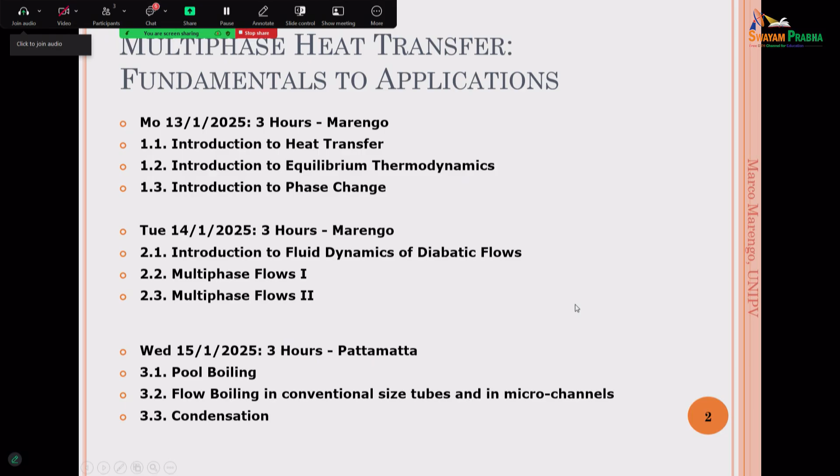So let's start, very simple. The first lesson is about the flow regimes and their classification, and the fundamentals of multiphase flow physics.

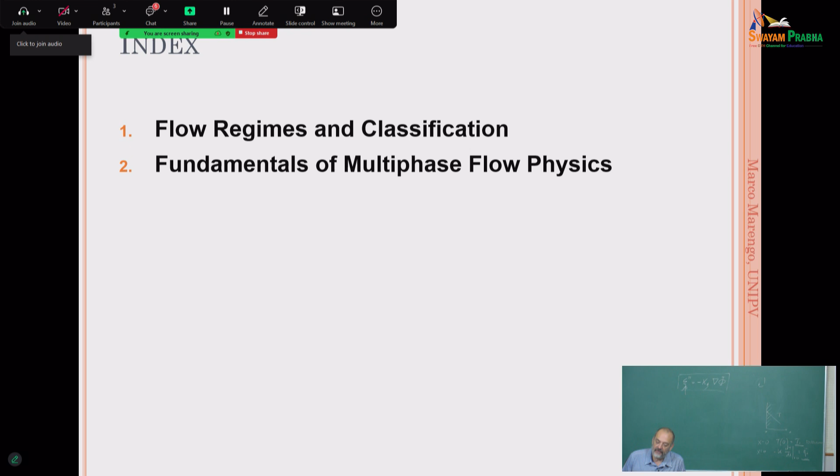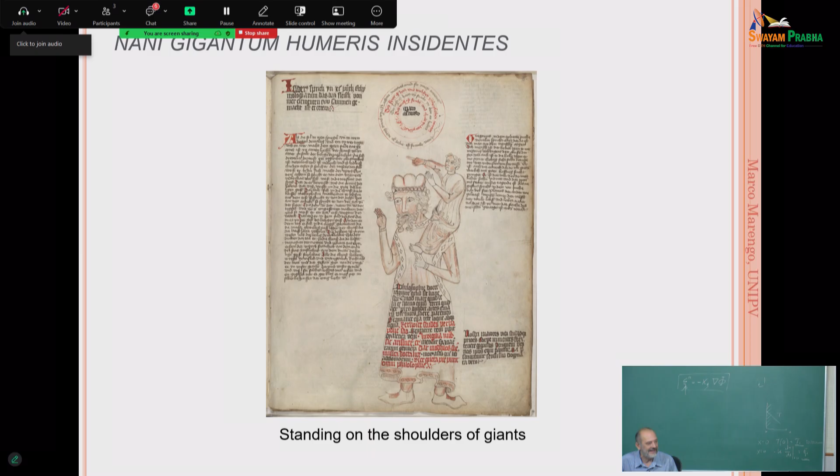There is a very important sentence in Latin, nani gigantum humeris insidentes, which means standing on the shoulders of giants. This is something I like very much. You saw before I used the book of Bird, Stewart, and Lightfoot. In statistical mechanics, there is a book of Huang that is very good for me. Every time I'm giving lectures, I ask myself, where did I get these notions? I was a student 40 years ago, studying all this kind of stuff.

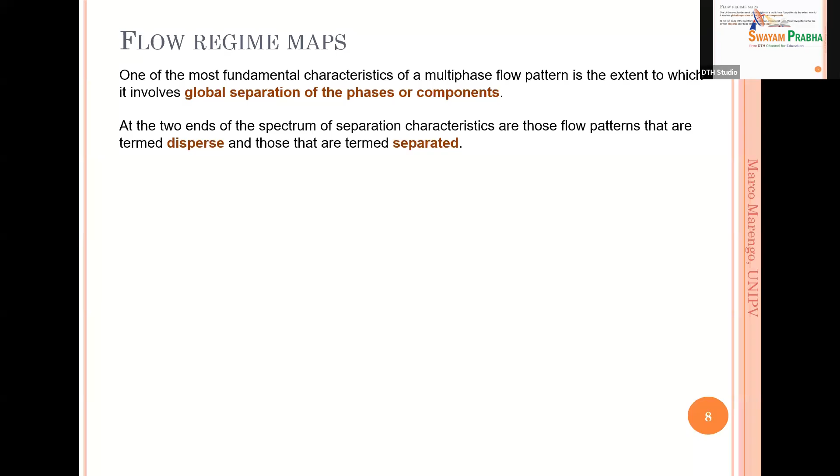About the first thing, we need to understand when we have different phases or components, the separation among the phases and components. There is a large spectrum. You will learn, as I was discussing before during the break, that with multiphase flows nothing is 100% safe, secure, and reliable. There is always a kind of gray region of knowledge that we may have. For example, the classical separation in multiphase flows is between dispersed and separated flows. But again, between these two ends, we have something in between. So we are starting with the complexity now.

But the definition is very clear. A dispersed flow is a flow in which one phase is completely distributed and dispersed inside the continuous phase. For example, imagine solid particles floating in a fluid, or bubbles in a pipeline, or droplets like in a spray. You are spraying droplets, and these droplets are going around, exchanging heat and mass with the environment, with the continuum phase.

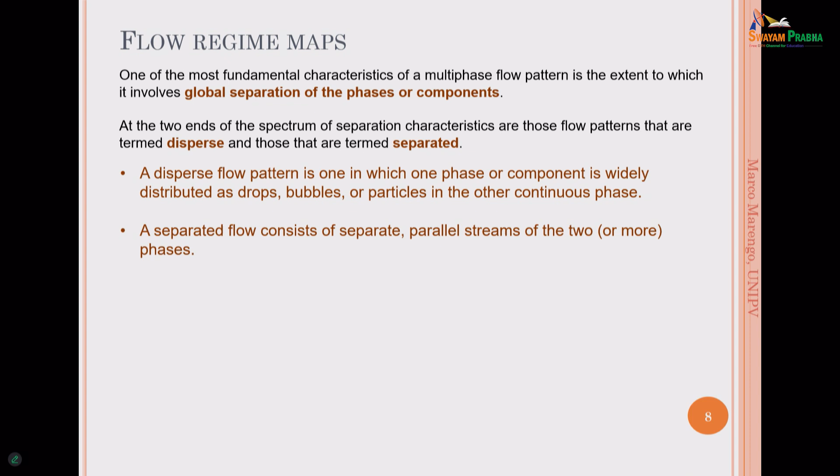Then we have a separated flow, for example when we have two phases that are completely separated, such as stratified flows. They are living almost an independent life, separated in this way. So we have a flow, for example, water and oil. The oil is floating and the water is going in another direction. There is something in between, which is the interface, and we are going to study this on Thursday. But apart from that, we can write an equation for the water and for the oil.

But pay attention, this simple distinction about the two phases is not so easy. What we can say is that if we have an asymptotic limit for dispersed flows, when we have a very large number of small particles - imagine a lot of nanoparticles in a flow - we can consider this as a single phase, homogeneous flow. Of course properties will change: if you have nanoparticles inside the system, the viscosity may not be the viscosity of the main flow, because of the presence of nanoparticles, and also the heat capacity and conductivity change. But we can average, and consider homogeneous flows like a single flow where we have different properties. This is the asymptotic case of the dispersed flow.

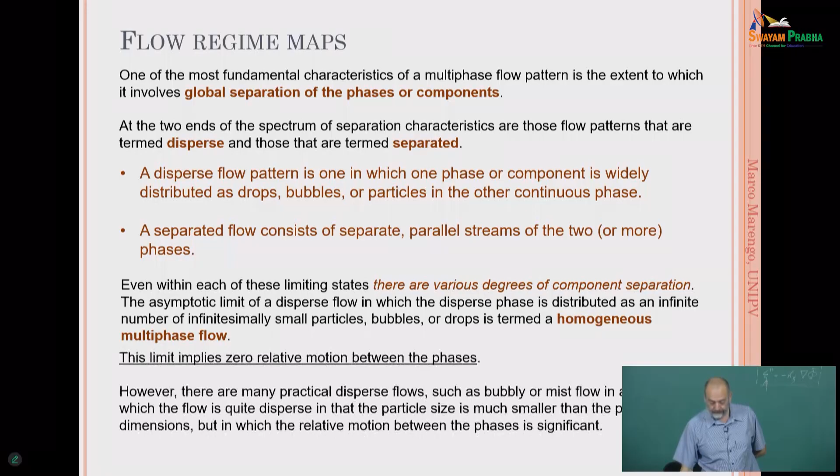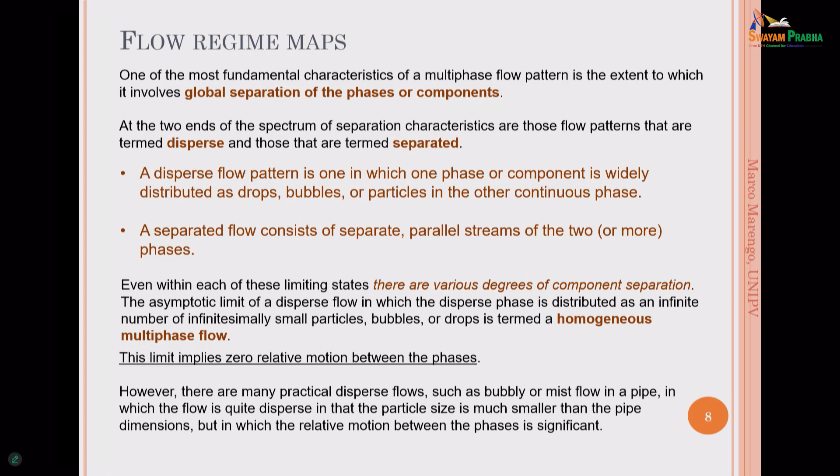In this sense, this means that the nanoparticles are following the flow at all points, so there is no difference between the velocity of the continuum phase and the velocity of the dispersed phase. As I said, there are different levels of separation. For example, I mentioned the water and the oil - this is a very typical example.

Consider also the so-called annular flow, which we are going to see. Annular flow means that we have liquid on a pipe, around the pipe, and gas that is flowing inside. There is an interaction in terms of energy and momentum, because, for example, the gas can create waves, and from the waves we can create droplets that are produced by the movement of the gas.

Because there is, let's say, a tearing of the liquid in this way. Okay. So, is this dispersed or separated, now, you see? Then it's becoming difficult. Is it separated? Yeah, it's separated because we have liquid and gas inside, but then we are producing droplets, right? So it's also dispersed. See, there are different degrees, okay? So it's always a little bit difficult.

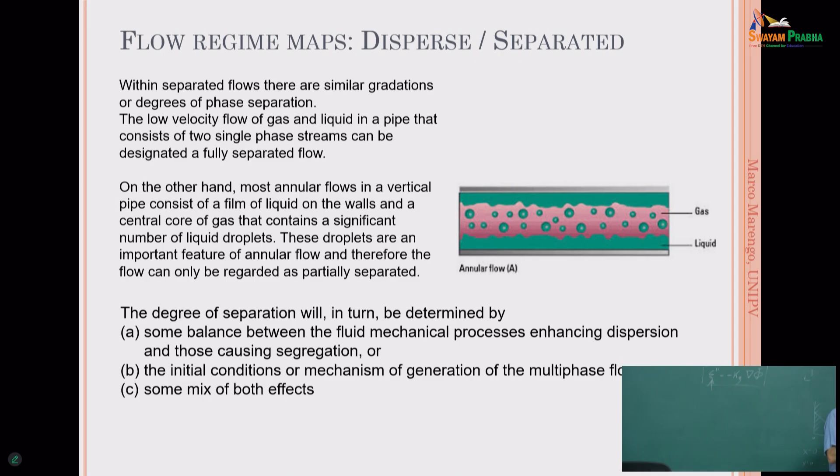But, for example, when we are thinking about a spray, we can say that a spray is a kind of dispersed multiphase flow, okay, with the droplets that are going around. So the degree of the separation depends on at least three factors. Let's say two factors and a mix of the two others. One is the balance of the fluid mechanical process of dispersion and segregation, okay? But also the initial conditions are very important, so the boundary conditions.

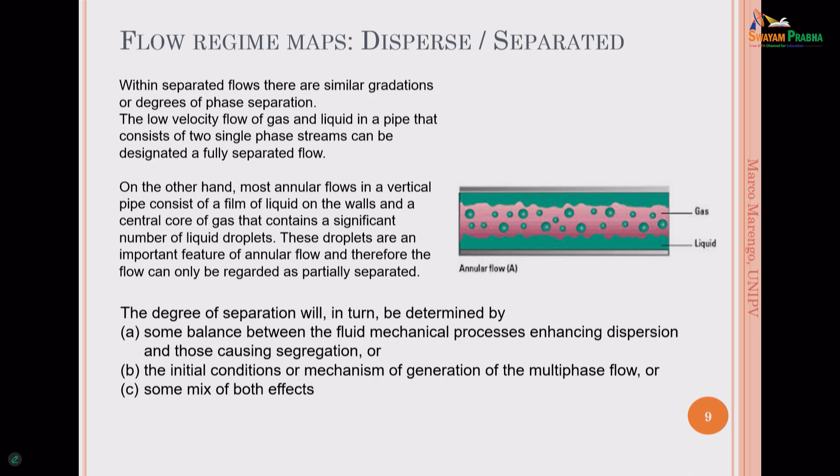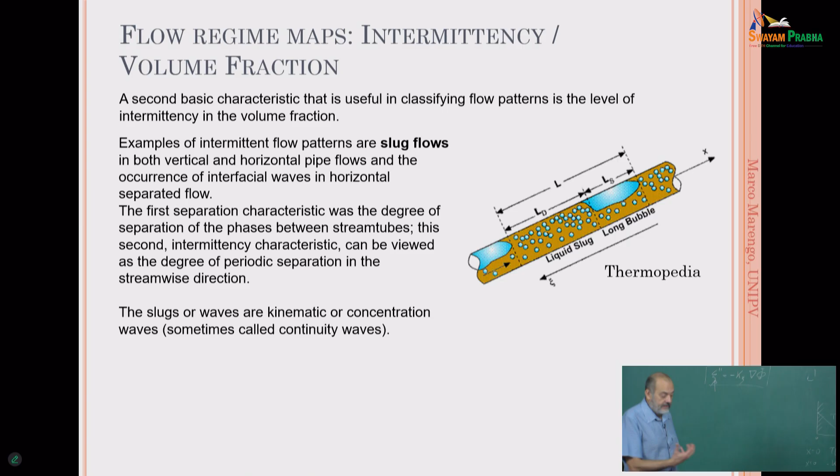The initial conditions in terms of generation of the multiphase flows, or the boundary condition, again, is a generation of the multiphase flow. Then we have to consider another basic characteristic of the multiphase flow, which is the so-called intermittency. Okay, so is it possible that the regimes are going to vary? For example, imagine to have a big bubble, so we can say, oh, this is the slug flow. So we have a flow of the liquid, we have a bubble inside.

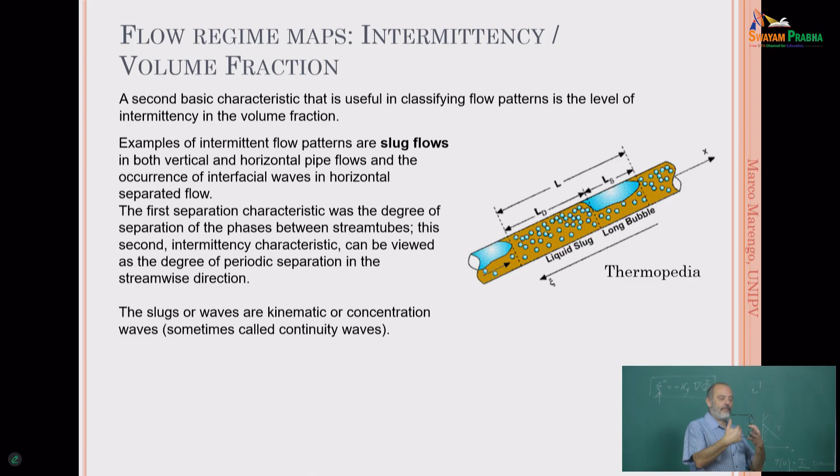Everything is nice, but then at a given point, this bubble is going to break, or we are going to have some other phenomena, okay? A strong acceleration, sloshing, for example, that is happening also for propellant and for space applications and so on. We have sloshing. So what is happening is that this nice bubble is going to produce a lot of bubbles, okay? So we are going to pass from one regime to another,

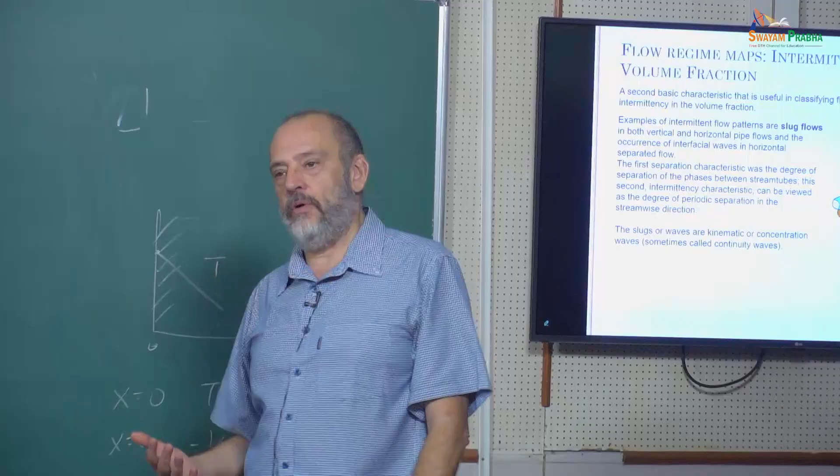and maybe back to the first one. So in the multiphase flow, we can say there is one regime, and we are going to see these different regimes, but it's possible also to have an intermittency. So we can have a time for one regime and a time for another regime, and vice versa. Okay, so the things are becoming really super complex.

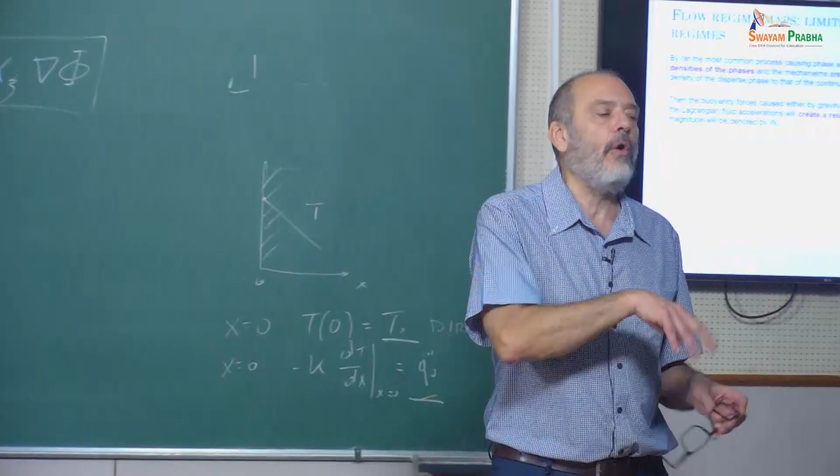Another point to consider is the fact that in many multiphase systems, we are going to have a difference of densities. Oil, water, solid particles and the fluid, gas and liquid, and so on. But the difference of the density, when we have an acceleration, or let's say a bulk force in general, gravity, means that we have a separation due to the buoyancy.

Okay? This is the reason why we are doing a lot of experiments in microgravity, for example, in space, linked to the difference of densities, because of course, when you don't have an external force, things can change. Or maybe we can even better understand what is happening, because we are switching off one of the components of the momentum equation.

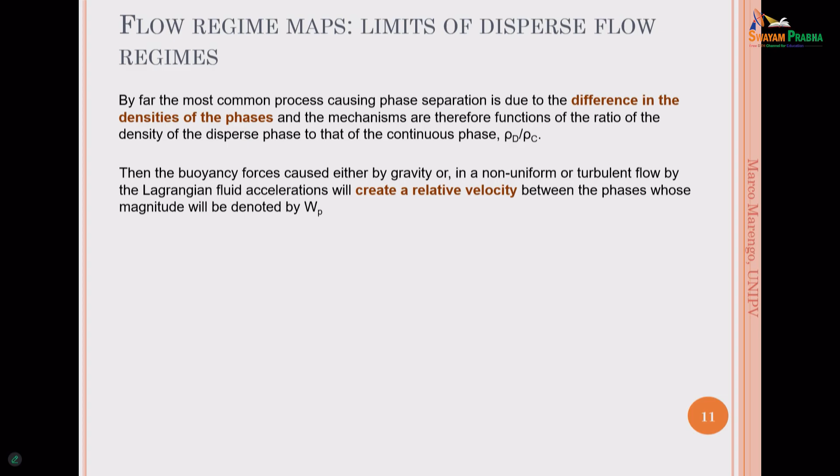And then there is another point. Consider a multiphase flow, imagine to have bubbles inside the liquid, okay? Liquid that is flowing. The bubbles can maybe expand or they can contract. So you are creating local accelerations. Okay, so we need to consider an equation that is much more complex with respect to what we had before, because it needs to consider the interaction between one component with respect to the other.

So remember, we did these shear stresses in the first hour. Okay, fine, it was good. Complex, but more or less we understood. But now if we have another component, bubbles, particles, and so on, the particles can cause another stress. For example, imagine that you have solid particles that are going to rotate inside. So this rotation is producing a vortex. So it's producing extra stresses.

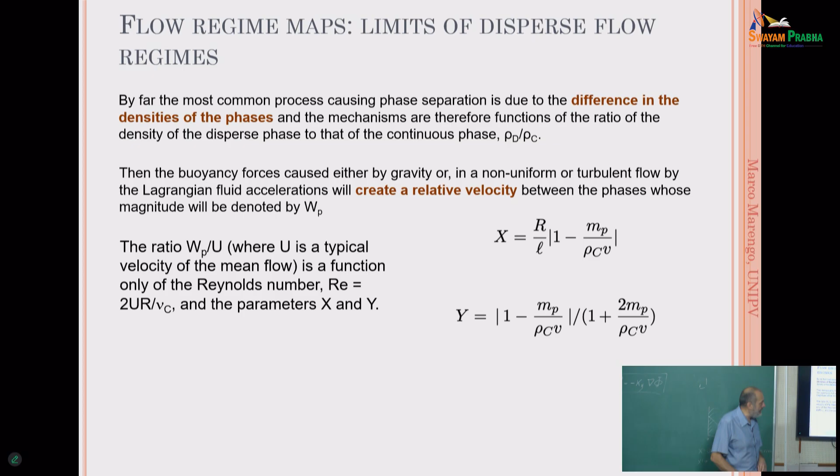X and Y again contain the mass. R is the particle size, and MP is the mass of the particle. L is the characteristic length, for example, of the nozzle, and V is the volume of the particle or the sphere that we have. Okay, so then, let's say, asymptotic condition. I have no time to enter in this field, but what will be interesting is to understand how local accelerations of the dispersed component can influence the mean relative velocity inside the flow.

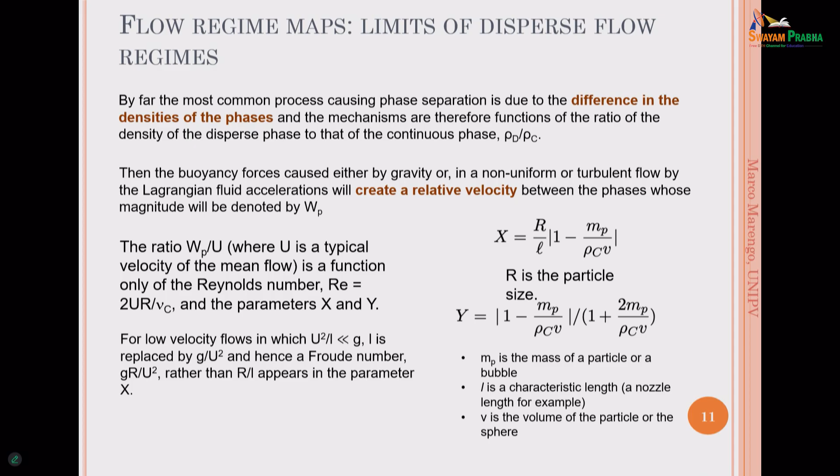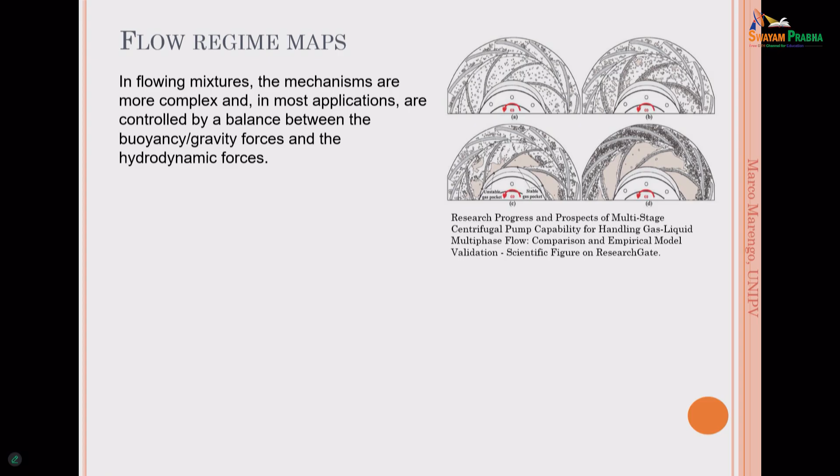And so, as you can understand, we have buoyancy and we have acceleration, no? Because of the different density. Well, we can use this information saying that, for example, when we have different conditions in terms of density, we are going to have segregation of the particles, the bubbles, and so on.

For example, if you consider something that is rotating and we have solid particles, a solid particle usually has a density that is bigger than the density of the continuum phase. So imagine you have in a system solid particles in a fluidized bed, something like that, and then you have a gas inside. If we put the gas in motion, creating a vortex, for example, it's very clear that because of the centrifugal force, the particles are going to touch the wall. No? It's a cyclone system.

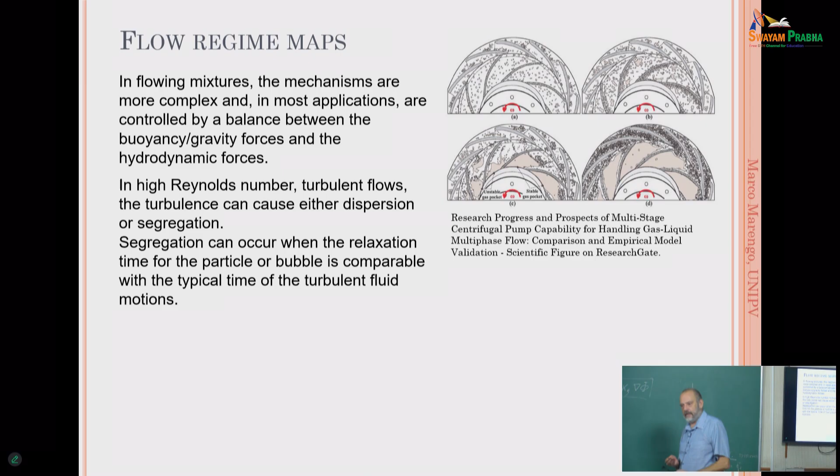Okay? This is interesting. If the density is different, for example, if the density of the particle is smaller than the density of the liquid, when we create the vortex, we are creating another situation. We are almost obliging the bubbles, in this case, to construct forms, because they are going to aggregate themselves. So you are going to construct forms like you saw here, where this is interesting because this is the velocity of particles inside, okay, in atmospheric flow.

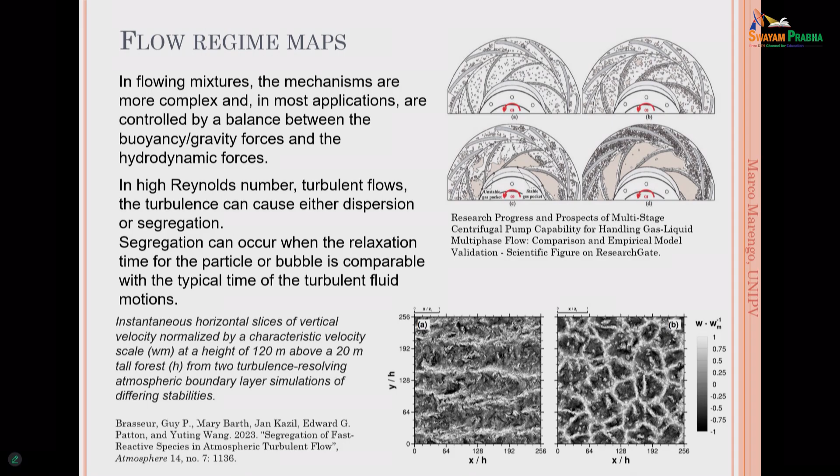Atmospheric flow, sorry, is a multiphase system. It's quite complex, very complex, okay, with a lot of different things. And we spoke about something that is rotating, so the solid particles going to the wall. The bubbles are going to build structures, because the density is lower than the continuum phase.

And when we have characteristics like what we have in the atmosphere, we are dealing with turbulence because the dimension is very big, okay? So in this case, we have structures like that. So we are forming clustering of the dispersed phase. And there are a lot of studies about this kind of situation, okay, where we can see really what is happening.

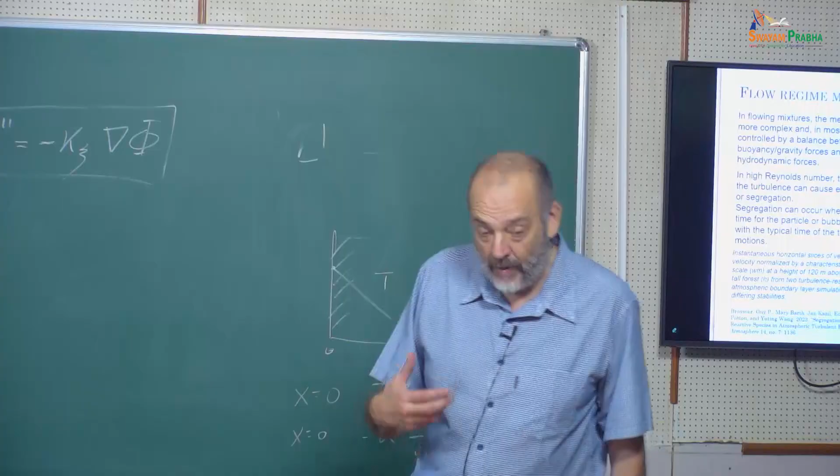Another point to say, we said that already, but it's better to repeat: the particles have an effect on the turbulence level. We are going to see this later on. So there is an interplay between the two phases, okay? And it's quite difficult to understand what is really happening.

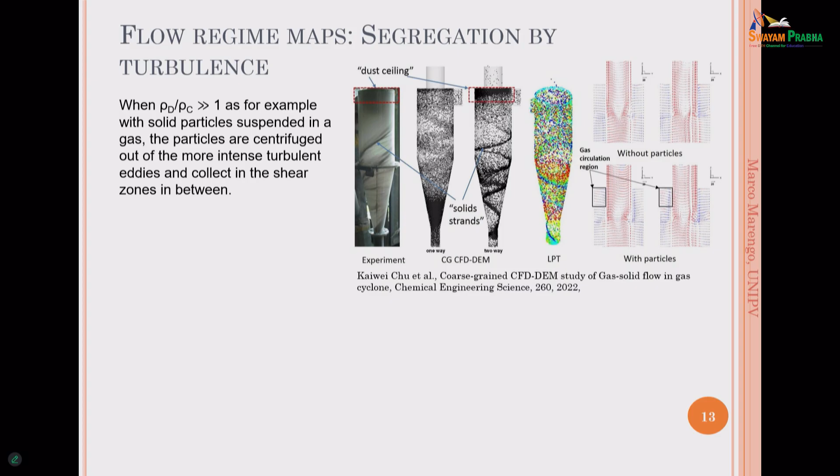In fact, for example, this is the classical condition, as I told you, of particles in a cyclone. And you can see here that the particles are going to form, and you have different conditions, no? And you can also try to simulate what is happening in this cyclone. We have a gas circulation region. We have a region without particles, and so on, okay?

So, for example, with cavitation, the formation of the bubbles is changing the characteristics of the motion of the flow. Okay, so these are already quite complex situations to study. They are changing the turbulence level, the turbulence intensity. So as you can understand, it's quite complex. You can see other material here if you want to know a little bit more.

The formation of the bubbles is interesting because of cavitation, for example, and on the opposite side, we have formation of condensation. We have formation of droplets. No? Again, they are influencing the turbulence level and so on.

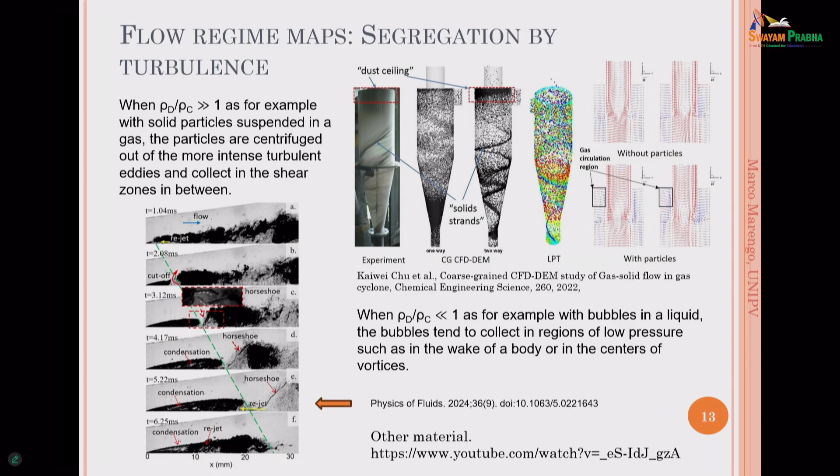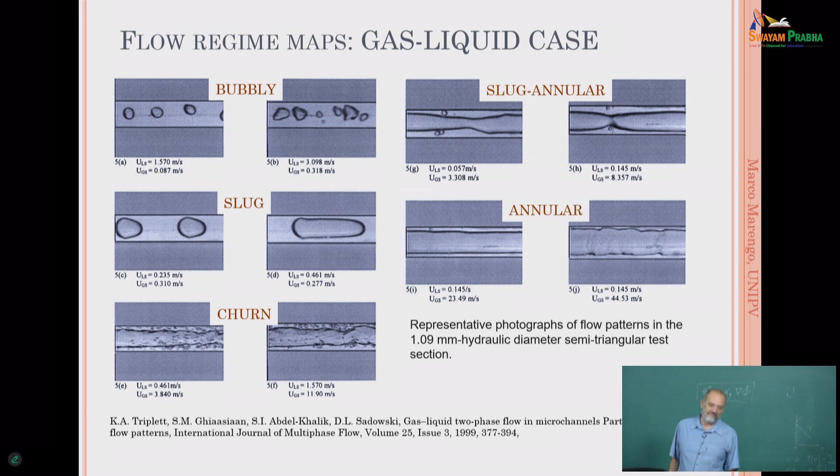Then we have churn flow, where we have what we saw before. So it's a kind of annular flow, but we have a lot of bubbles going around. So it's a mixture. Here the separation between the two phases is a little bit more complex. It's difficult to say it's separated or, well, I don't know. Then we have slug and annular.

So we have the slug, where we already have the gas inside in the form of bubbles, where the velocity of the gas inside is pretty small. But then we have annular flow. Annular flow means that the gas inside has a given velocity, and the liquid film maybe is dragged away because of the motion of the gas.

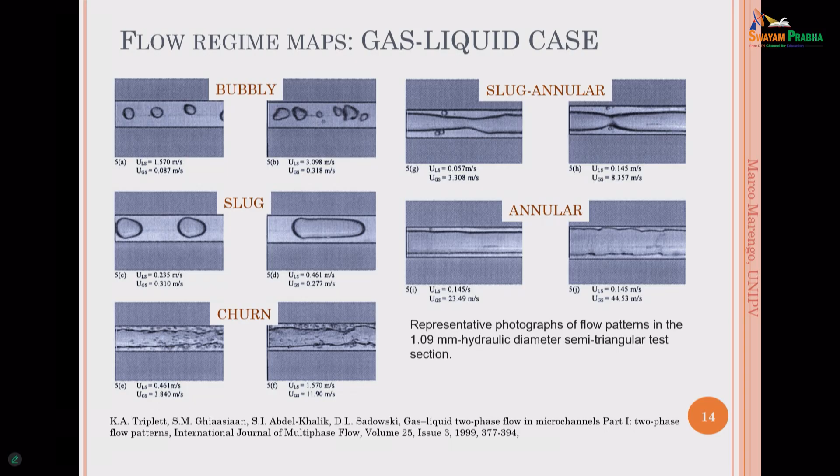So this is the classical picture of what is happening. In this case, it's a very, very small channel, because it's a channel of 1 millimeter. I put this one and not other cases with the bigger pipes, because really I wanted to stress the fact that multiphase flows are really a multi-scale problem. So we can pass from, let's say, 100 nanometers.

I know a guy in Paris that is studying the flow in nanotubes. A little bit difficult. So he's putting a nanotube, and he was able to have the flow and visualize the flow that is going outside. And he was also able to measure the pressure drop. So what? It's not possible to have, let's say, a manometer, a gauge, no?

It's not possible. But he did this because he had an idea of the velocity of the outlet because he measured the cone of the fluid that is going outside. From the dimension of the cone, it's possible to do some numerical simulation and to extrapolate the velocity at the entrance and the exit. So it's possible to understand the difference of pressure. So it's a nanoscale phenomenon. The nanotubes were about 20 nanometers, so small, but then we can have also big pipes. So it's really completely different, meters.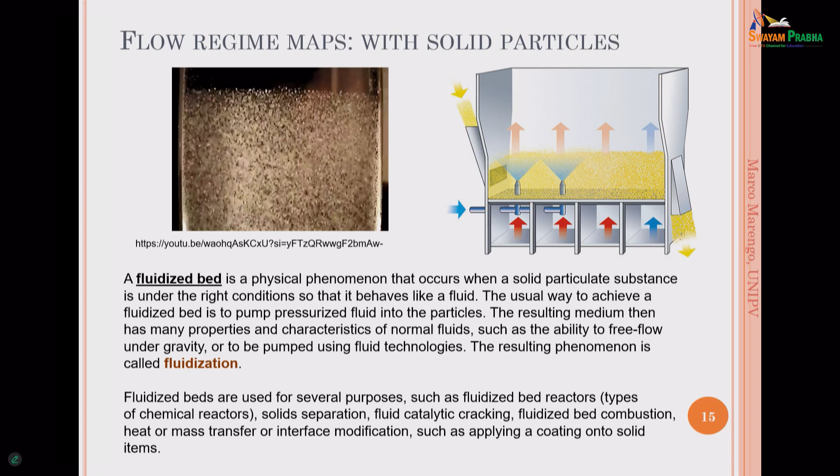So we have this kind of situation where we are using the continuum phase in order to keep the particles separated and convey the particles to another point. In this case, the fact that we have so many particles is saying that we are already in the direction of a homogeneous flow. So we could consider this system as a single phase, but with other properties. Of course, if you want to study, for example, the turbulence, here it is quite complex because the particles have an influence.

So many times what my colleagues are doing, not we because I didn't do simulation on that, is to put coefficients. And with the coefficient, you need to arrange the viscosity. So instead of having viscosity, you have something else. Usually it's a Newtonian fluid, at least, but then you need to change the value of the viscosity in order to fit with the experimental data, for example. It's not possible really to calculate how much is the viscosity for all these kinds of situations. And so you have different conditions and so on.

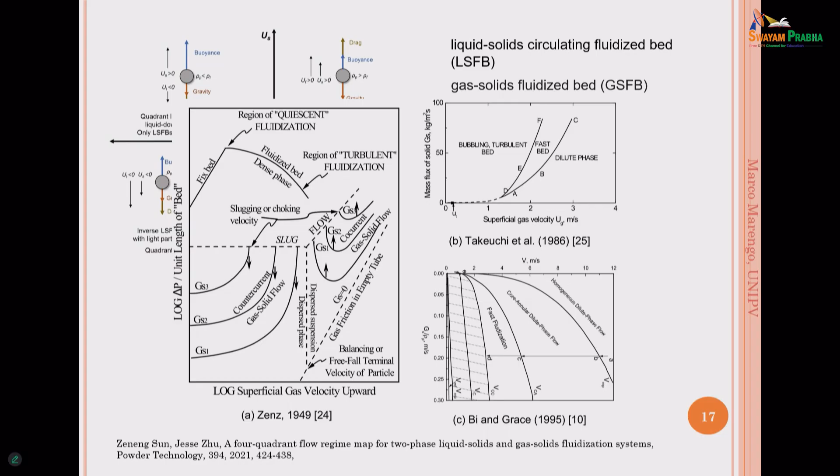This is a paper, for example, on the gas-solid fluidization system in powder technology, and you can see different conditions and so on. We are working since, look at this paper, 1949, and here is Takeuchi 96, 86, 95, 2021. So it's so complex that we're still looking for solutions or looking at very good simulations. And this is happening for all the multiphase flows. There is no perfect solution. We are always trying to refine something that was done in the past. This is the reason why it's so important as a field. So you can do a lot of different things.

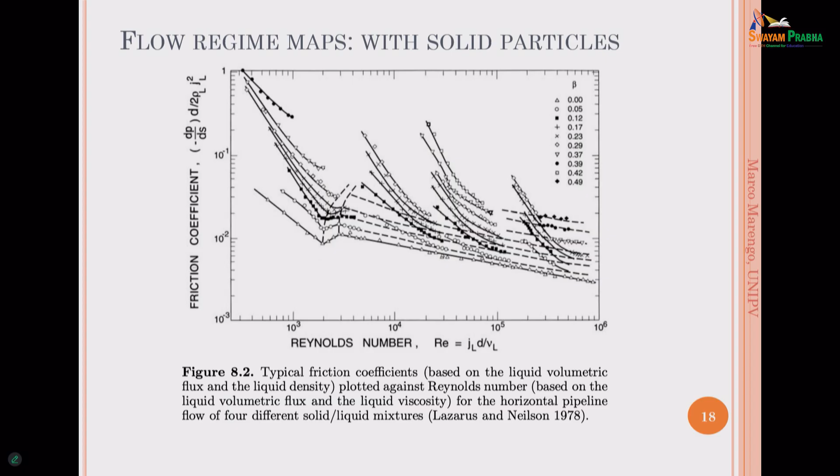Well, in the case of solid and liquid, depending on the dimension of the particles, beta is representing the dimension of the particles, you have different conditions, see? So, in fact, there is a very strong influence on the friction coefficient due to the presence of the particles inside. This is interesting, and this is not a numerical work, it's an experimental work, and only to replicate this graph numerically, wow, is something. It's not easy at all.

Okay, this is a very short introduction in order to understand what we are speaking about. The introduction was really about dispersed and separated flow in order to have the same vocabulary.

Now we enter in the physics. Okay. We saw that in order to build the mass conservation equation, the momentum equation, the energy equation, we use the concept of having a small volume. We said, okay, we have a small volume, dx, dy, dz, and we did the balance on this volume. Okay? Good. No problem.

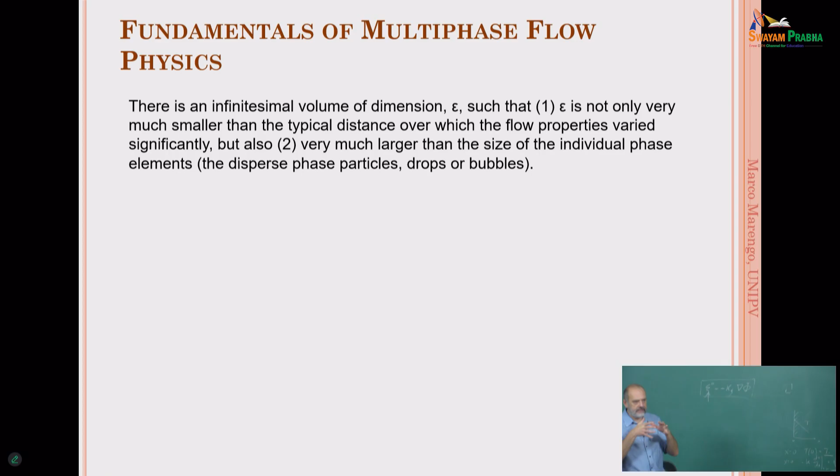The point is that when you have a second component, the choice of the volume is not, let's say, so easy. Before it was a single phase. We take a volume, instead of dx we have delta x, delta y, delta z. Okay, I like it. We know that we have air, we have water, whatever. Now we put inside particles.

And the problem is that epsilon cannot be everything. We would like that the volume must be very small in order that the properties are not changing so much. But also the volume should contain enough particles in order that we can understand the effect of the particles.

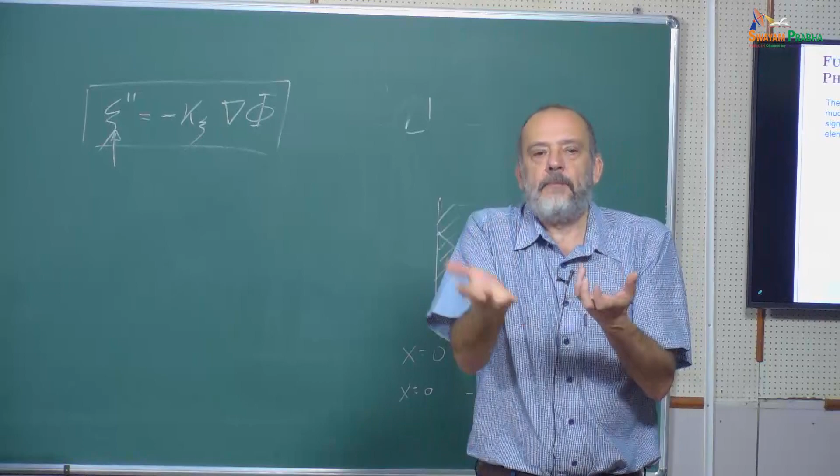Understand? Before, when we took the volume dx, inside of this volume the temperature was this one, the pressure was this one. So this was large enough to contain enough liquid, in terms of molecules, to determine the property of the fluid. But the properties were constant inside the volume.

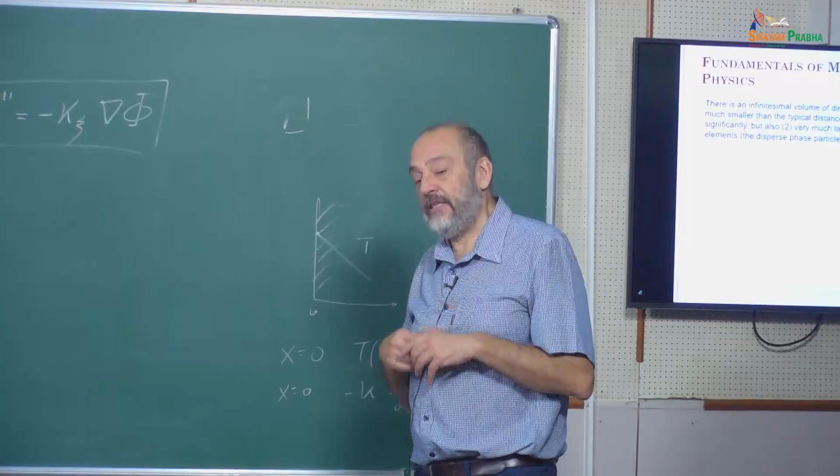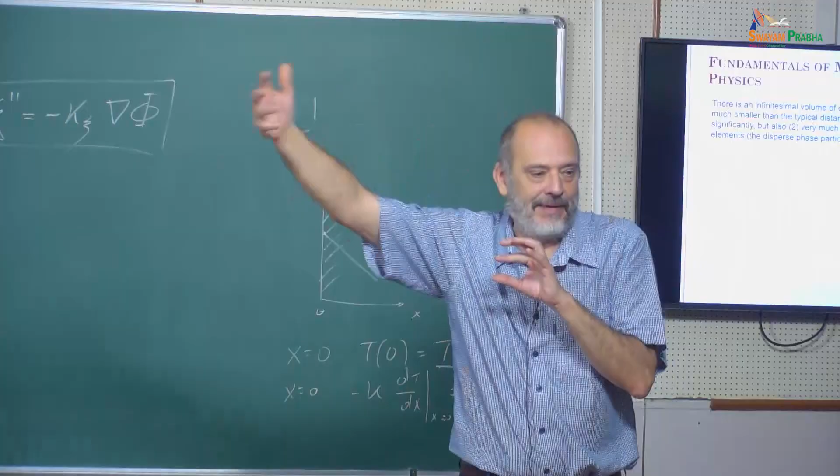When we put the particles inside, we have the problem that also with the particles we need to have enough particles. So if it is very dispersed and we have a small volume with only one droplet, well, this is another case. It's a study of maybe the oscillation of one droplet inside the volume. But this is not the volume that we need to consider for this kind of equations. So this is the first point.

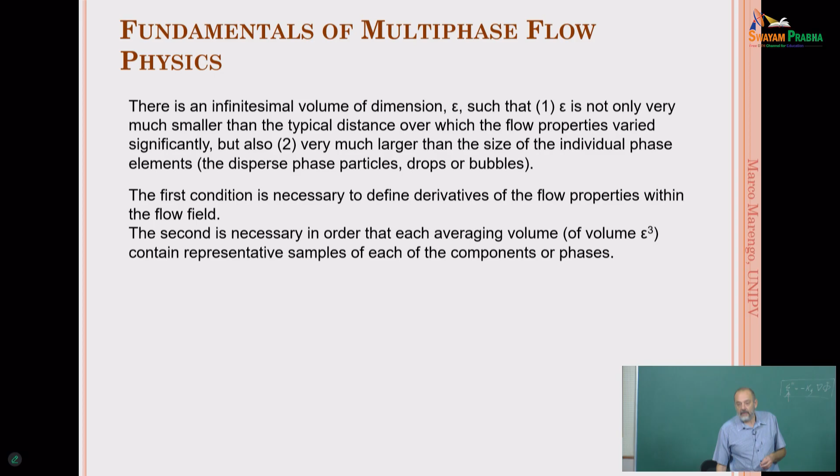The fact that it is small enough, so you have constant properties, is important in order to have smooth derivatives for the flow. And the second one is important to have enough samples of the dispersed, of the other component. The point is that the second component has an influence on the first one, and this interaction is important because it's changing the properties, even in a small volume.

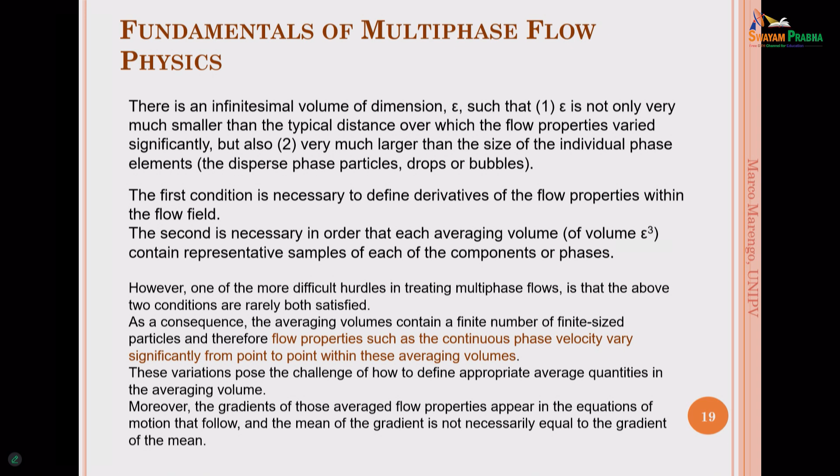So in fact, in multiphase flows, many times we are speaking about average quantities. We are going to speak about average densities, average velocity. So it's quite difficult to have one single value that satisfies both conditions of a big enough or small enough volume. So even the choice of this volume with multiphase flows is becoming a little bit tricky.

And one can say, well, okay, but at the end you are going to write the equations. Yes. But when you're doing numerical simulations, you are going to notice that this is a big problem. How big should the cell size be? Then it's becoming a problem.

Because you need to have a cell size that is containing something. If you are doing Euler simulations, you need to have enough droplets or bubbles in order to have an average property which is constant inside the mesh size. But this is again not obvious for other conditions. So this reflection is important because it has consequences for the numerical simulations.

Only for the notation, we are going to have the continuous phase C, the dispersed phase D. Of course, liquid, gas, vapor, and solid is very simple, and so on. Then we are going to use J for the volumetric fluxes. In the I direction, the flux is going to be the sum of the different contributions of the fluxes.

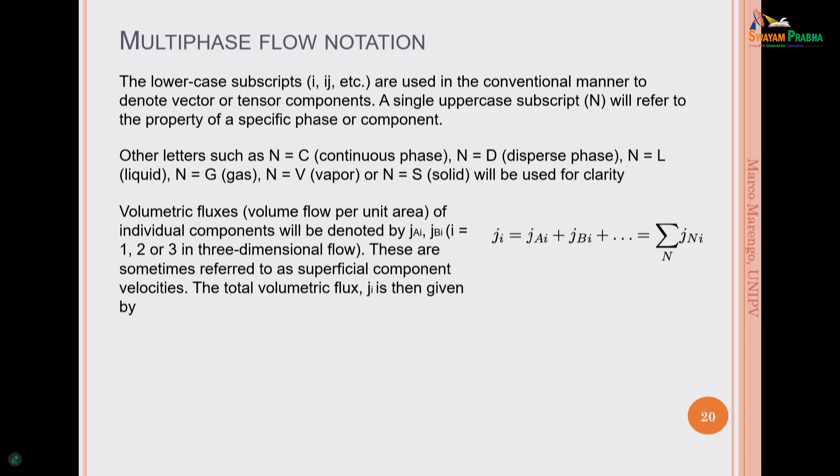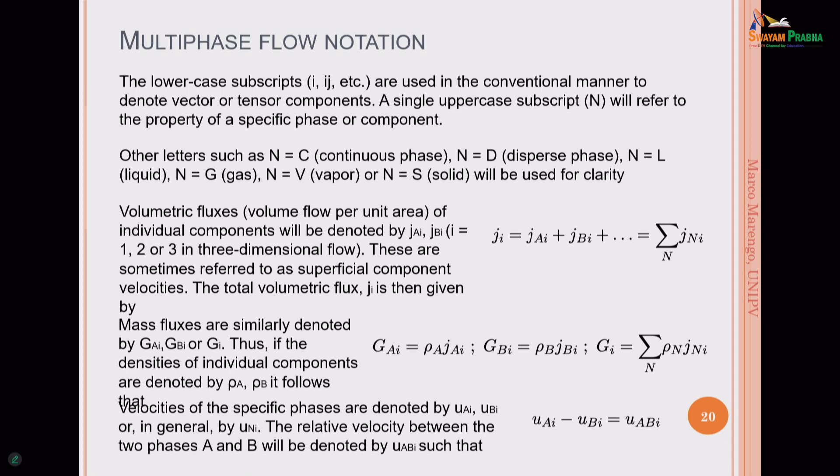And we have also the mass flux. We are going to use the letter G. So G of component A in the I direction will be rho A J I A, and so on. I think that is clear enough. And then we have the relative velocity. In direction I, we are going to have the difference between one component and the other: U A in direction I minus U of the other component B in direction I. So these are the relative velocities.

One concept that is very important is the volume fraction, which we call alpha n. Imagine having two components only, A and B. We are saying how much is the volume of one component with respect to the other. So what we wrote in terms of J, we can write as alpha n U n I. The total volumetric flux will be alpha A, U A, I, and so on, the sum of all the components of the fluid. This is also important: it's the fraction, the ratio between the volume of one component with respect to the total volume.

Using this concept, we can also write the mass fraction, but I think everywhere I'm going to use the volume fraction instead, to know how much is the fraction of the volume of one component with respect to the total volume.

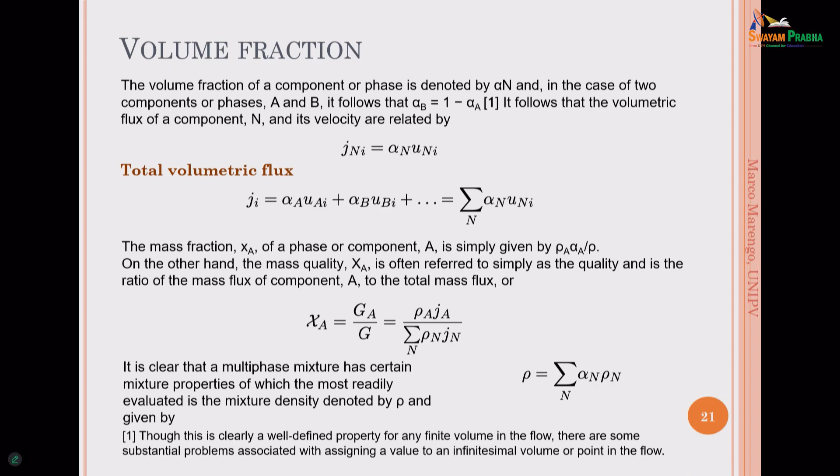I don't know what's happening because I checked this morning and there was a different position. I think when we translate from Mac to this one, something changed. But okay, it's not important.

Now we need to write the equation of conservation using the concept we saw in the previous lecture. The mass flow of a component can be written as the rho of component n times the volumetric J in the direction we are choosing, direction I. This is the net flow, so we can write the classical conservation of mass. I'm not repeating the demonstration, it's just what we did before, in the hour before.

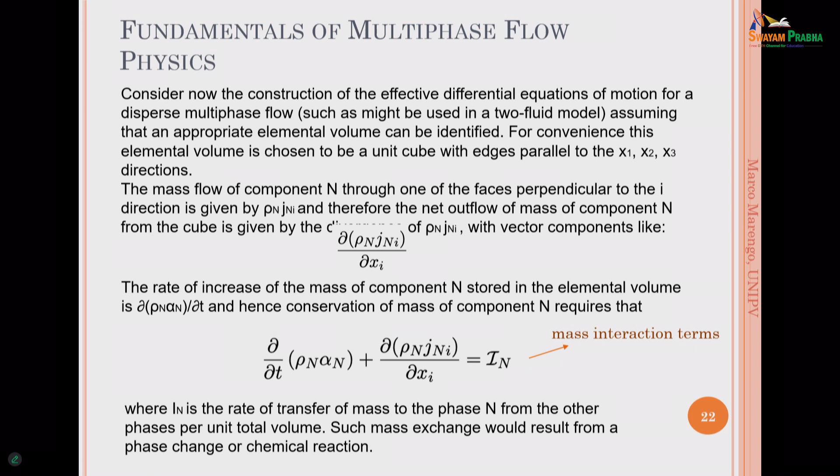In this case, why do we have a mass interaction term? Because in a two-phase system, we may have a mass exchange due to phenomena inside that transfer mass from one component to the other.

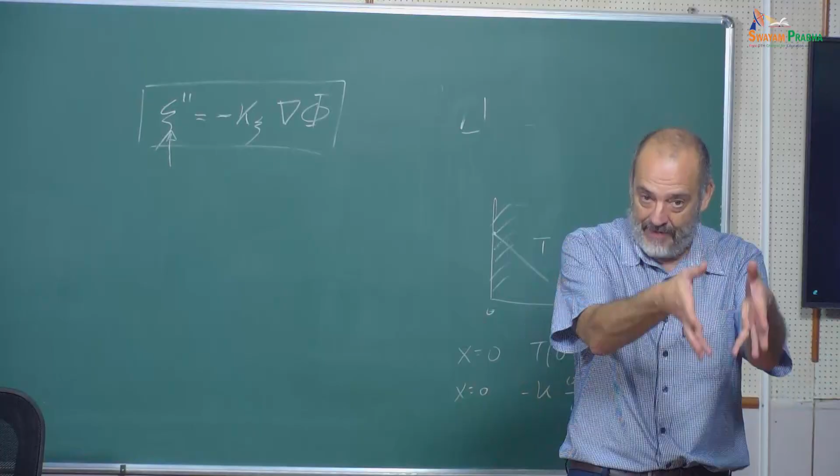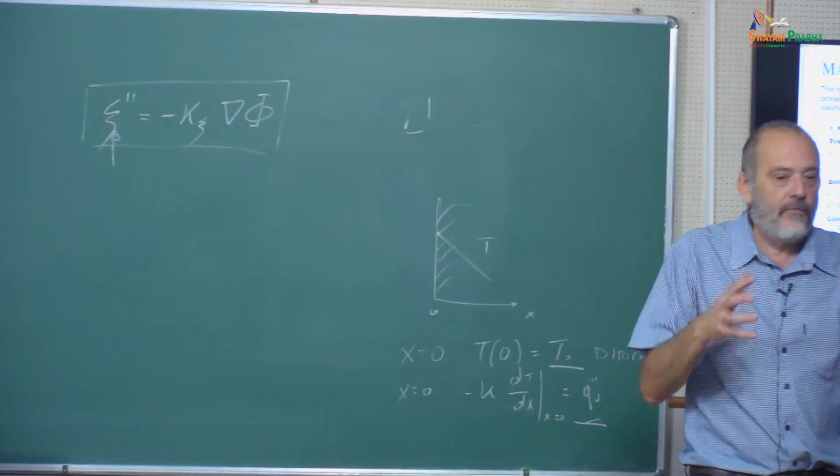So the mass conservation is going to change because we have these new things: evaporation, boiling, condensation, sublimation. Imagine dry ice going inside the gas—of course we have sublimation of the dry ice. The mass interaction terms are saying the rate of mass transfer into or out of a phase N that we are considering.

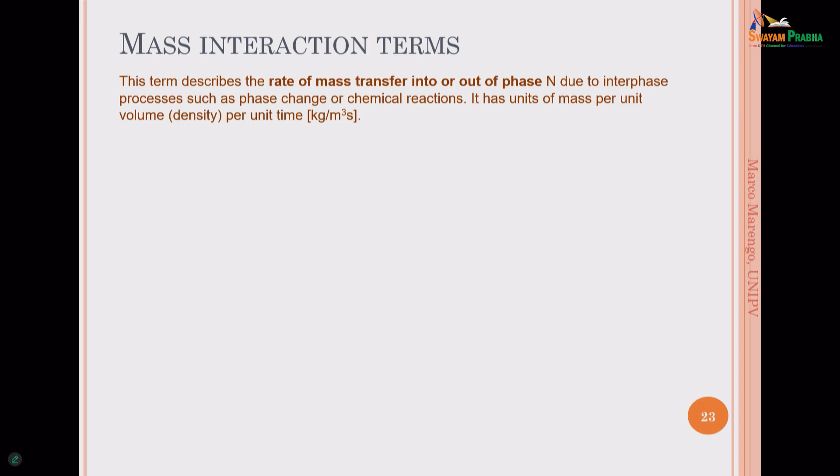The mass interaction terms, as you can see from the equation, have the dimension of density over time, so kilogram over cubic meter per second. This is very important because in two-phase flows we may have this kind of phenomena.

Or, for example, we can have chemical reactions, which also change the mass of one component with respect to the other. Or we have dissolution, or interphase diffusion, where one phase enters the other. For example, we might have a liquid and a gas, but the gas is dissolved by osmotic diffusion into the other one. This means we are changing the mass because there are these terms to be defined.

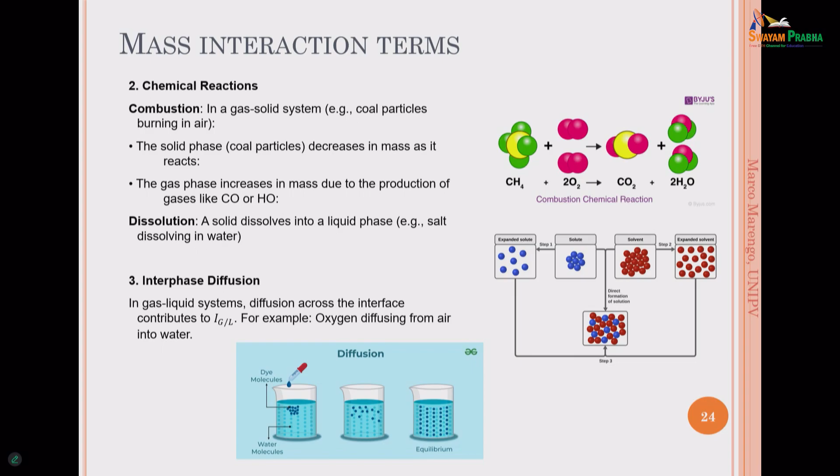At the moment you don't know these terms yet, but you will see. Do you understand the big difference? For the single phase this doesn't exist, but for two phases, or three or four, it can change a lot.

So this equation is called the phase continuity equation, or phase continuity equations, because we are considering the different phases. But it's very clear that if the gas is going to the liquid because of condensation, or the liquid is going to the vapor because of evaporation or boiling, the total mass should stay the same, at least. This means the sum of all the mass interaction terms, summed over all the components, must be zero.

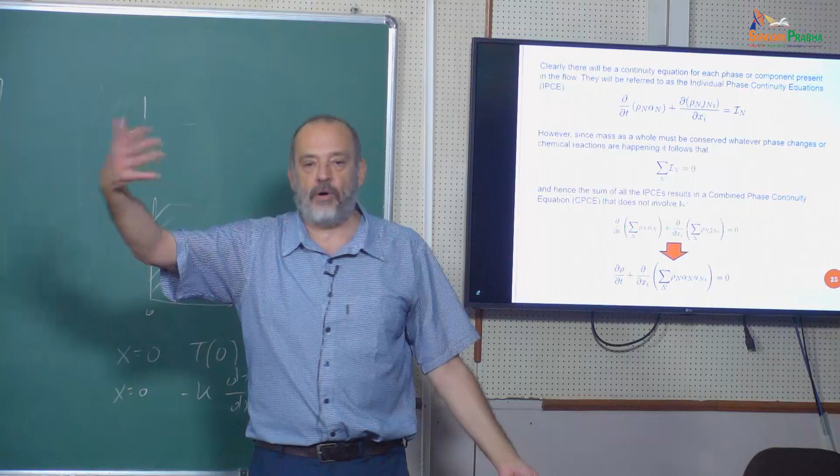So if we sum up everything, we end up with the final equation where the variation of the density inside the system is equal to the gradient of the mass flow rates, considering the volume fraction, and here we have a summation over all the components, which equals zero because we sum over all components. We can even consider average values, or check a condition where we don't have that, checking if the particles stay with the same number—if we have to follow the number of particles. I'm not doing this here.

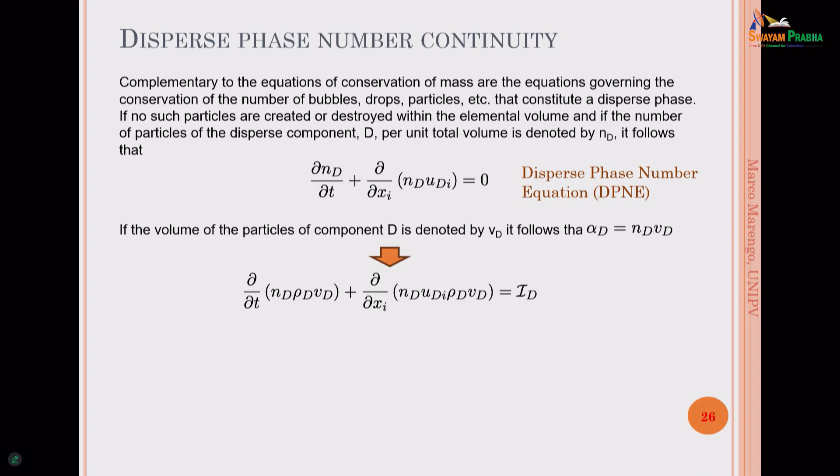Okay, momentum conservation. I don't have time to derive all the equations. Okay, this is becoming really too much. So I'm going to write the equations and then describe what is happening, but I don't have time for the derivation. I'm sorry for that, it's very close to what we have done in the first hour, only that now we need to consider the different phases. But in principle it's very similar.

So let's consider a dispersed and a continuous phase. It's very clear that we need to write this expression considering either one or the other, not both. I mean, we consider one continuous phase, we say this is the continuous phase, gas, and we're writing the momentum equation. Droplets, or bubbles in this case, and we're writing the momentum balance. So one and the other, we are not putting them together. Separate, this is important to say.

So we are doing the same thing that we did during the first hour. We are doing the balance, using the momentum conservation principle, and landing with something you can recognize. On this point, you have the rate, the variation in time of the momentum for the N component, written in terms of the volume fraction, because it's rho N alpha. And here you have the gradient of the momentum rate. Until now, it's fine. Of course, this is giving a value that we know must be equal to the force.

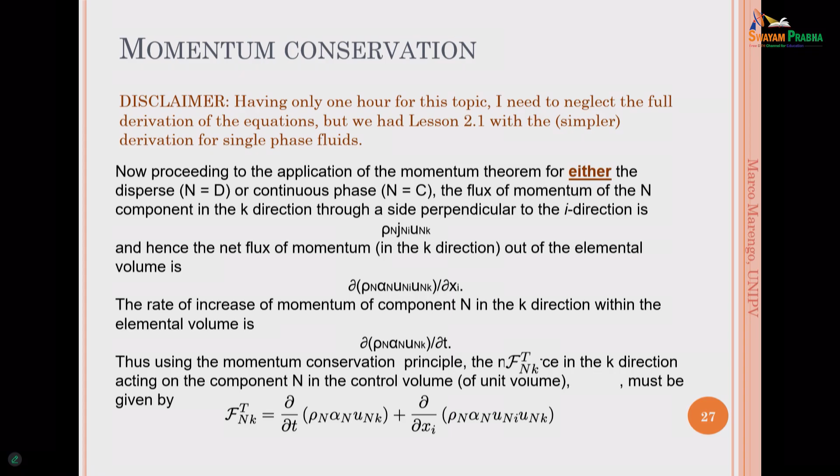And now the trick, this part is known somehow, it's not difficult. Now the trick is to define what we have here, so which is this force? There are many different contributions to the force. Let's start with the simplest, an external force. We have gravity, centrifugal forces, electromagnetic forces, and so on. So, external forces. The second contribution is due to the traction on the control volume. This is what happens when we have water and oil and we have a traction, a shear stress due to the presence of one component with respect to the other. This is a second contribution.

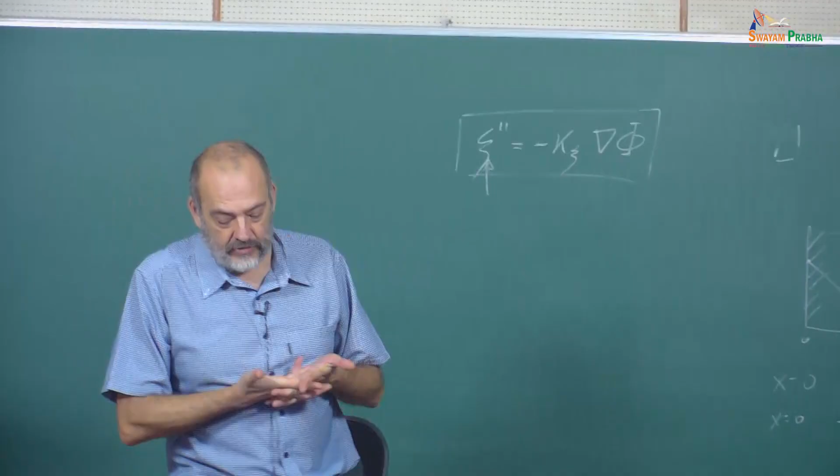Then the third contribution is linked to the fact that we have the force that one component exerts on the other component. So this means stresses, let's say. So at the end, what we may have at the beginning is something like that. This term, the total derivative of the mass of the momentum flux, is equal to the force linked to the external forces. Then we have the pressure, and we have the shear stresses. The stresses now, let's see, we are speaking about the stresses.

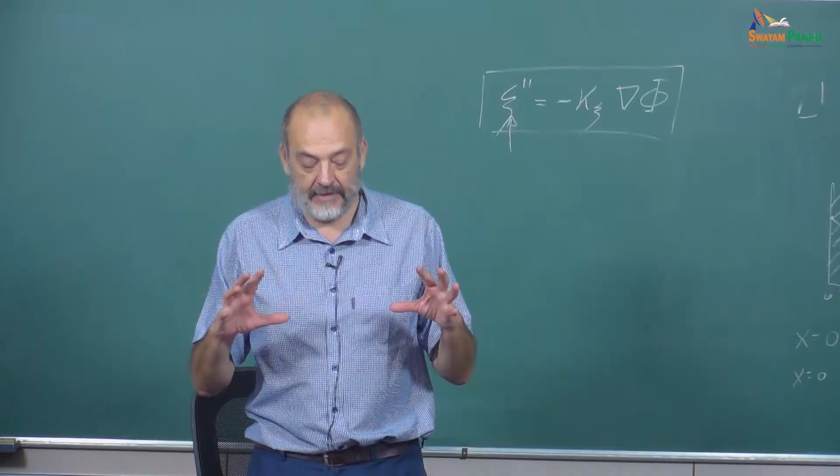The delta here is again a delta, not the Kronecker delta, but another delta. I'm using delta D, and delta D is 0 when we have a dispersed phase, and delta C is 1 for the continuous phase. Remember that I wrote this for either the dispersed phase or the continuous phase, and this is the so-called individual phase momentum equations.

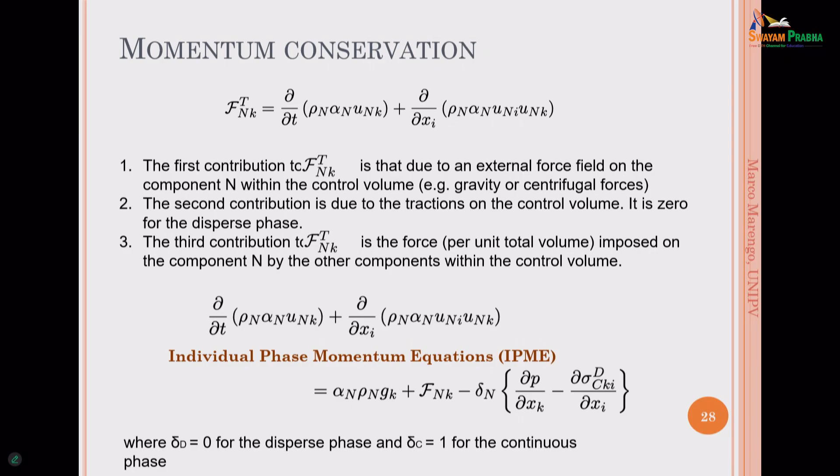Okay, so now if you are using the mass conservation, we get the term linked to the mass exchange, evaporation, boiling, condensation, and so on. So without demonstration, if you consider also that equation, and you put that equation inside the IPME, you obtain an equation that is plus or minus very similar to the first one.

Of course, there is a change, there is a change here, there is a change in this part, but you are going to land with this term. If you see, it's the mass that is changing, the interaction terms, multiplied by the velocity of the component n in the k direction. So you're landing with this term, and the first part is the classical total derivative. On the other side, you have this term that is a little bit puzzling, but it's very important because it's giving the variation of the mass for one phase with respect to the other due to the phase change, for example, multiplied by the velocity.

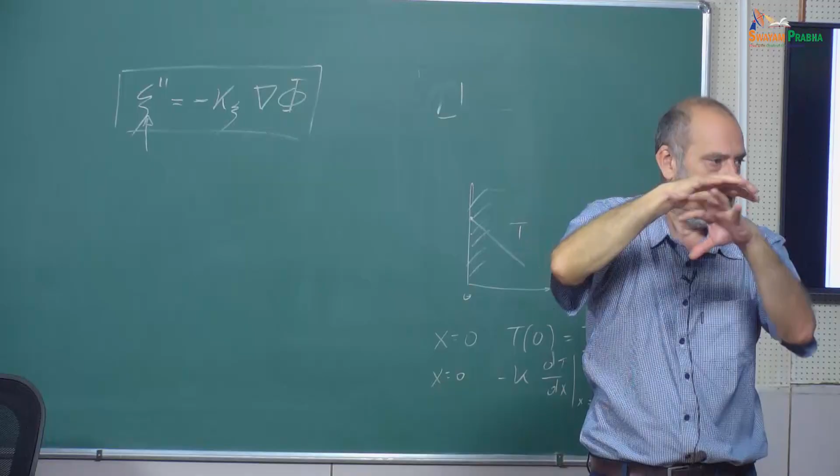As you know, maybe someone knows about the Stefan flow. Maybe, it's okay, it's not important to know. But there is a transport of momentum due to the fact that we have mass that is going to move. This was not existing before, for the single phase. Did you get my point?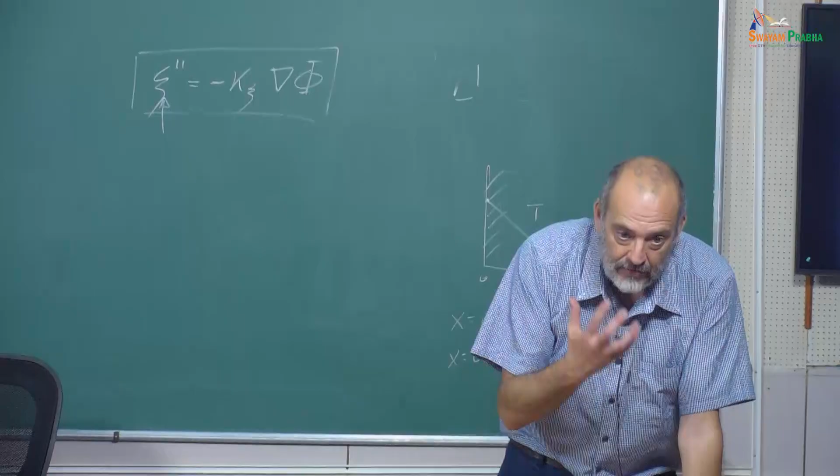When you have a phase change, we have mass moving in one direction or the other, or condensation. So with condensation, you are producing a droplet because you have a condensing vapor, meaning the mass of vapor is going to the droplet. So there is a movement. We need to consider the momentum created by the fact that part of the mass from the vapor is going to the droplet. This was not considered before, since it was a single phase.

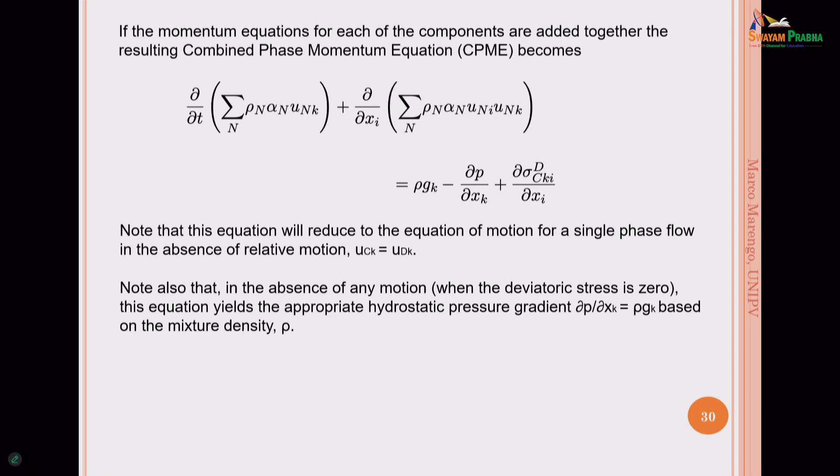If the two phases are the same, at the end we are going to land in the direction of the single phase solution. So consider now a dispersed phase momentum conservation. We have the total derivative of the momentum flux, and in this part we have the momentum that is linked to the mass exchange, and it is equal to the forces.

One is the gravitational force. Do you remember what I said before about the forces in two-phase flows? Which was the other important one, due to the difference of density, remember? So we have buoyancy. This is again something we need to consider. The buoyancy forces are really important, for example with bubbles - when there is gravity and the difference of density is important, the bubble is moving inside the system.

So we need to understand this, but then there is another force that is not written, but I can anticipate: if you have particles moving inside, or bubbles or droplets, there is another force created by the viscosity, which is the drag. If you are moving a solid object inside a fluid, you have a force called drag, and also a force like lift. So in the dispersed equation, we need to consider the extra forces present because we have different components with different densities.

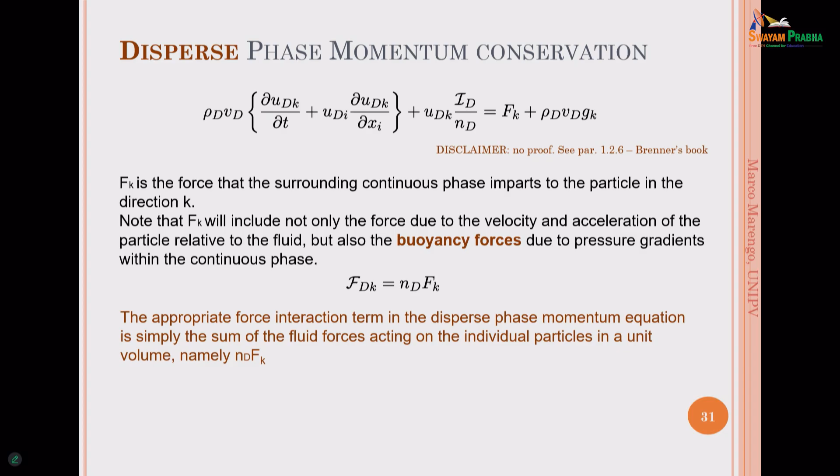So in fact, we are always doing something with simplification. Otherwise, here I'm presenting the most general equations. On Thursday we are going to look at specific cases, but here I need to put everything together to give a kind of umbrella, and then we are going to see. Let's pause. The five minutes... sorry, but otherwise we don't have time. I can recover a little bit on Thursday, but it's better to finish at least this part today.

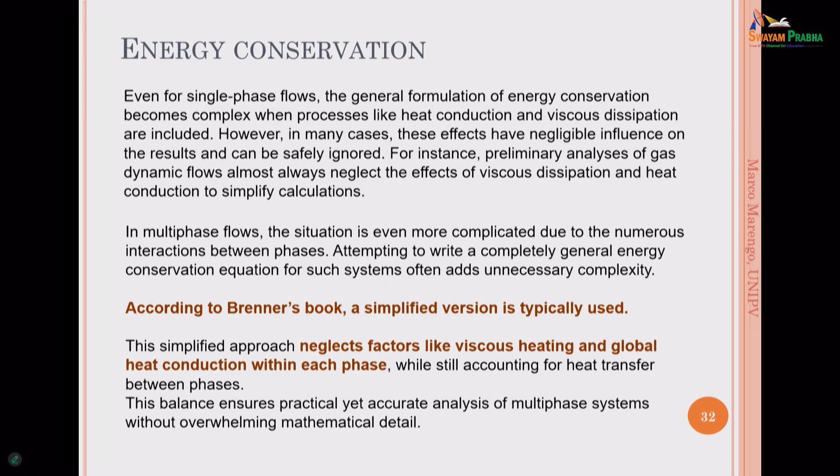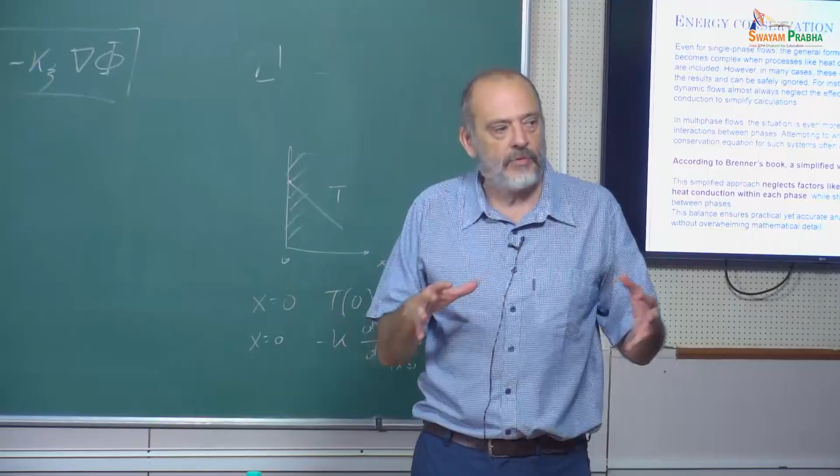So the big difference with respect to the single phase is that the mass interaction terms are really very important, and I bring these mass interaction terms with me. Also the forces are changing, because there are forces due to the fact that we have another component. This is the major message. Mathematically it can be complex, but we will see that it's not so complex when you write down equations in explicit form. But in a comprehensive form, this is the way to say it.